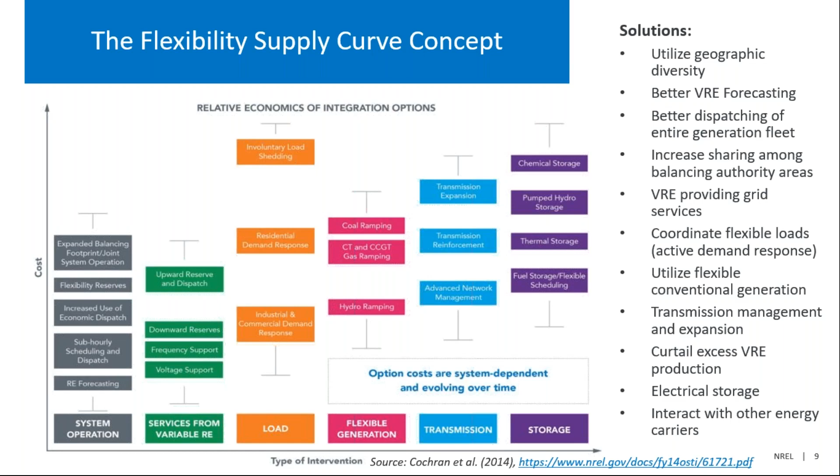You can see that storage was on the far right of this. It was the most expensive type of intervention you could do to get flexibility. There were a lot of cheaper things: increase your dispatch, build transmission, or get better forecasting of variable renewable generation. So there's a lot of things you could do, and we said do all this other stuff first and then do storage, because storage is too expensive. And because people kept saying you need storage for renewables, and we said no, you could get a lot of

renewables without storage. And then this thing happened where battery pack prices dropped by 90%, with projections to continue to decline. You've seen advances in other technologies besides batteries, so storage is becoming a much more viable technology. It's not the thing you do at the end once you've exhausted other options. Storage is moving more into the mainstream as something you do just because it's cost effective and cheap. And that's changed how people approach renewable energy integration in the power system. It's been really fun to see this change and see things evolve.

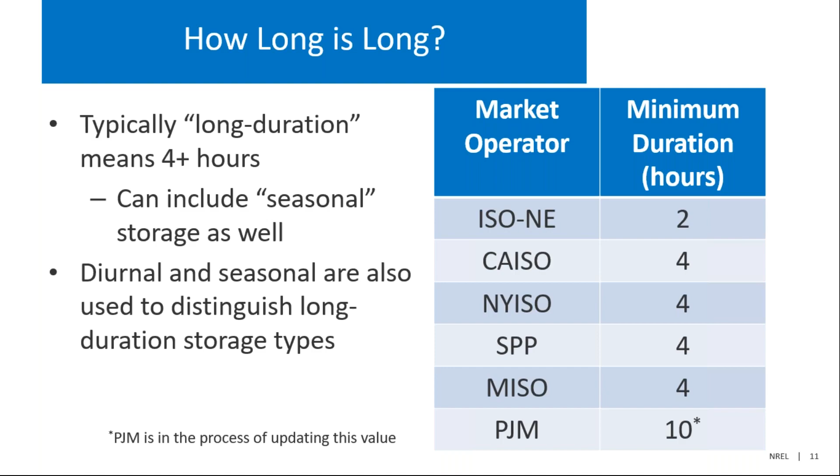So in a pumped hydro storage system, the size of your reservoir drives your energy capacity, your number of hours of storage, versus with a battery plant, it's the number of battery modules. So what counts as your long duration storage is going to be different based on the type of storage system you're looking at. And the way you add more power versus more energy is going to change based on the type of storage system you have. So this also makes storage really interesting, because the cost of adding power versus capacity is different in each type of storage system. It makes different types of storage able to contribute to the grid in different ways.

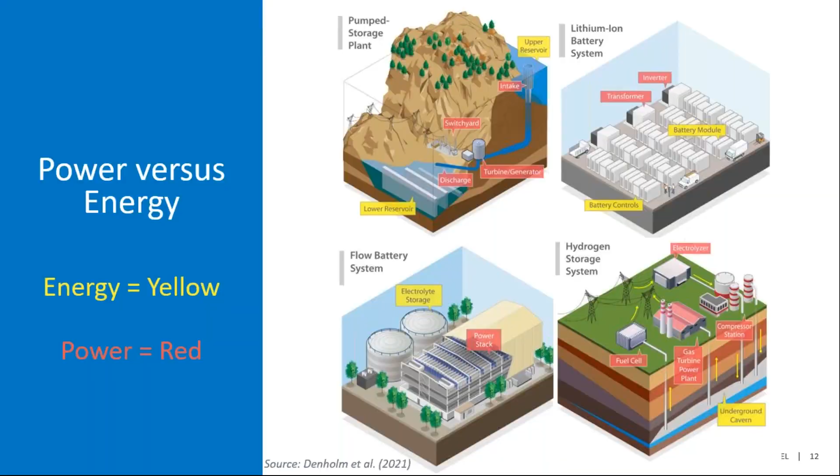You need to know what that system is for. The other thing I want to highlight is just that the battery is still a huge part of the system cost. So when you're looking at how much it costs to install a battery system, the battery is still the largest single chunk of that. So even though battery costs have come down a lot, that's still where most of the cost goes for these systems.

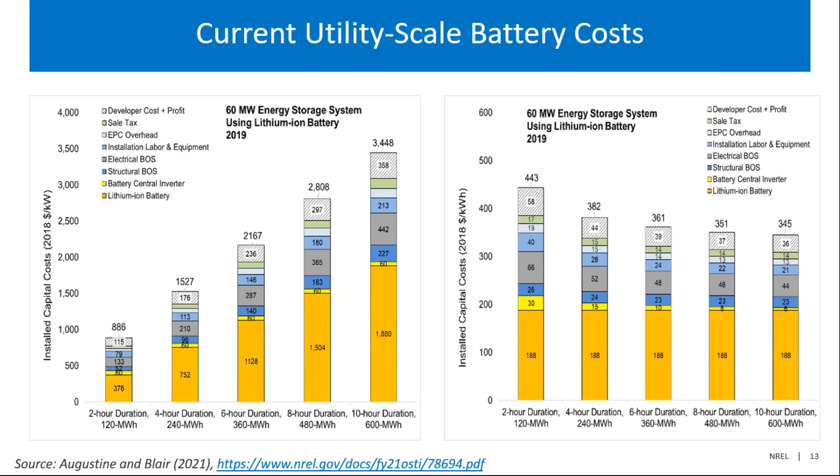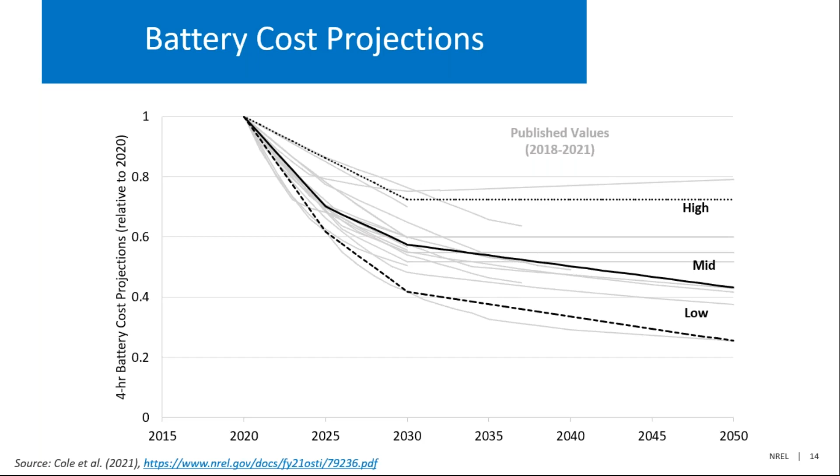So it's a pretty exciting thing for the battery space in terms of a lower cost storage option out there to supplement the variable renewables that are going onto the grid. So I want to shift here to talking about how we see storage getting deployed and how storage deployment might evolve out into the future. So this is kind of a conceptual framework for how we're thinking about storage deployment in the United States. So we already have a lot of storage out there.

So we've got the 23 gigawatts of pumped hydro. That's in this 8 to 12 hour range for most of it. It does vary in its duration, and it's used for a lot of different things. That was built quite a while ago. It's been a long time since a new pumped storage facility has been built. So that's stuff that's already there.

Then phase one, the first phase of storage deployment, has been the stuff that's already been happening over the last decade or so, where we're looking at operating reserves, short duration batteries that are primarily doing short duration services. Those have been happening. That market's pretty shallow. There's less than 30 gigawatts for all of these reserves across the whole country. So even if storage provided all of those, you'd see less than 30 gigawatts of deployment. And it's unlikely storage would be the exclusive provider of operating reserves, given the amount of capacity that already participates in those markets.

So then the big market that really gets a lot of people excited is this peaking capacity market, where you're deploying storage to serve as a peaking plant. These would be in the 2 to 6 hour range, more in a 4 to 6 hour range for more of those, where you need to ride through an afternoon or evening peak with a storage device. And so there's a lot of potential for that. It's strongly linked to PV. We'll explain how that works, but up to 100 gigawatts of potential there.

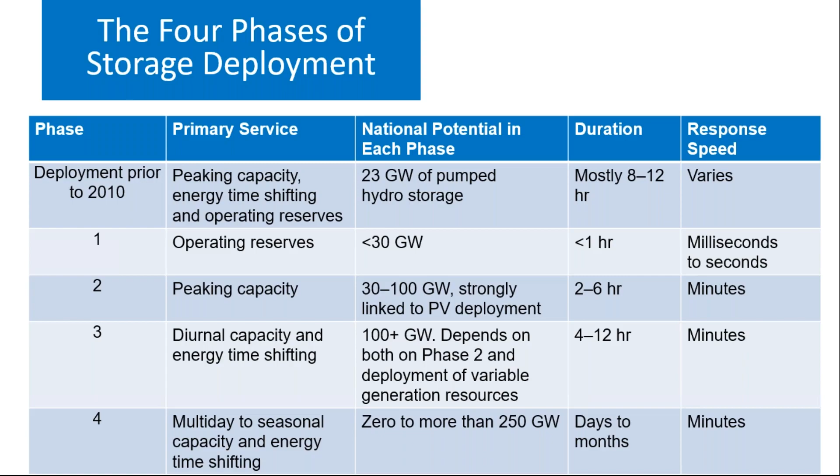And this one is unclear what its potential is. A lot of it depends on how far you want to decarbonize the grid, how much renewables you want to put on the system, and how cheap it could get. Those two pieces will drive its potential. So I just want to talk about a couple of these pieces real quick, and then we'll hand it over to the next folks.

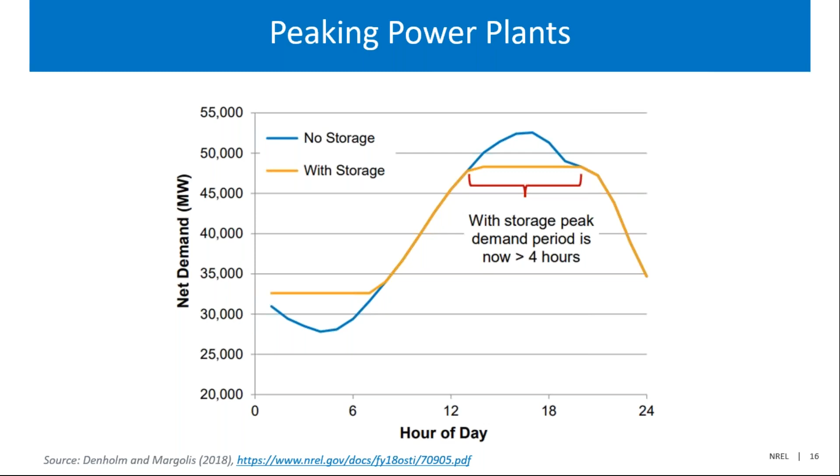So after you added 3,000 to 4,000 megawatts of 4-hour storage, your peak is now flat and it's longer than 4 hours. You can't put another 4-hour device on the system and be able to serve that peak because it's now too wide. So people looking at this know that you're going to eventually saturate these shorter durations, the 4-ish hour range.

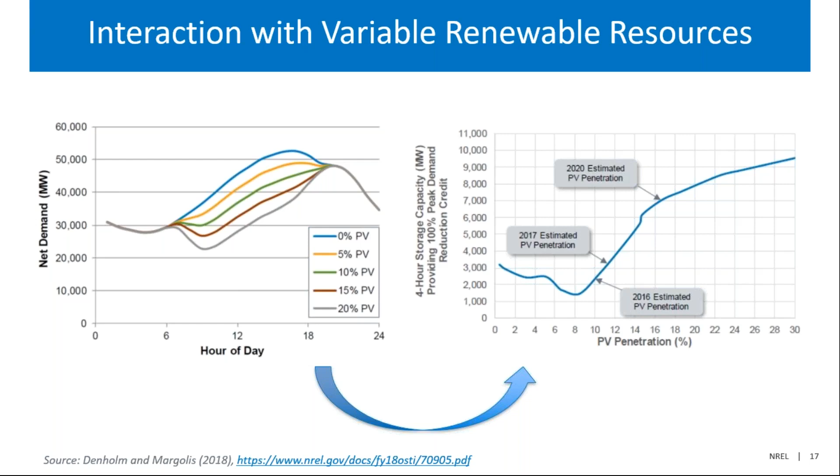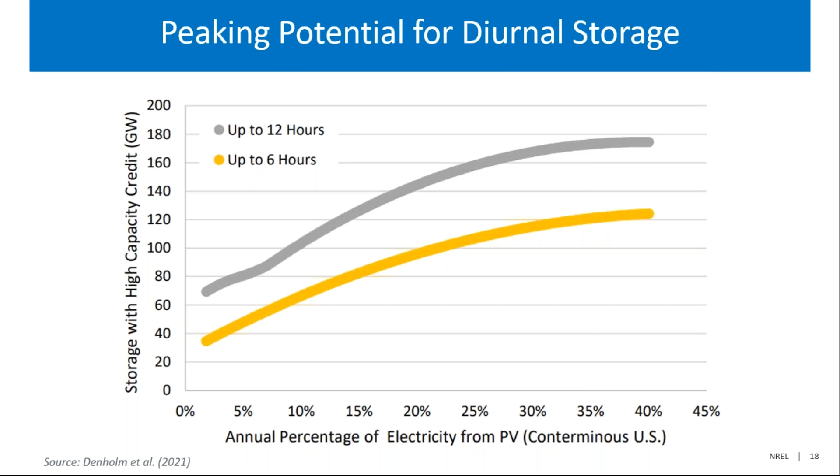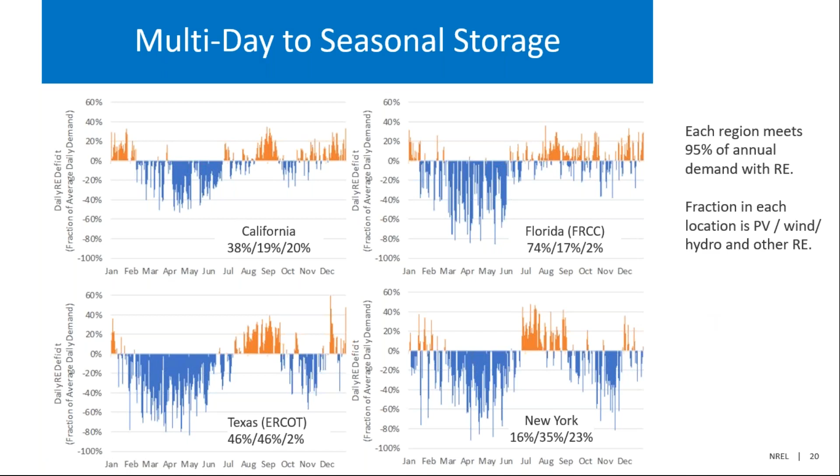So once you start getting these really high renewable energy penetrations, you need these longer durations. You need to move to these multi-day seasonal things. And this is an active area of research. There's a lot going on here to try and understand what's going on. So this is all really fun work. I've enjoyed being involved in this.

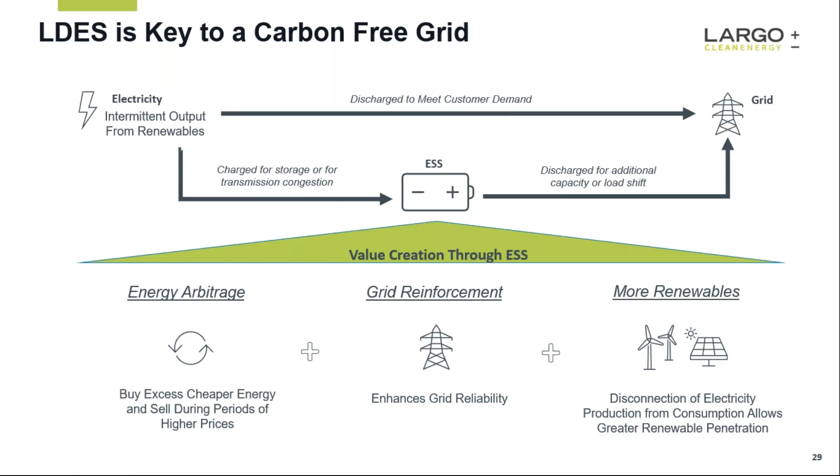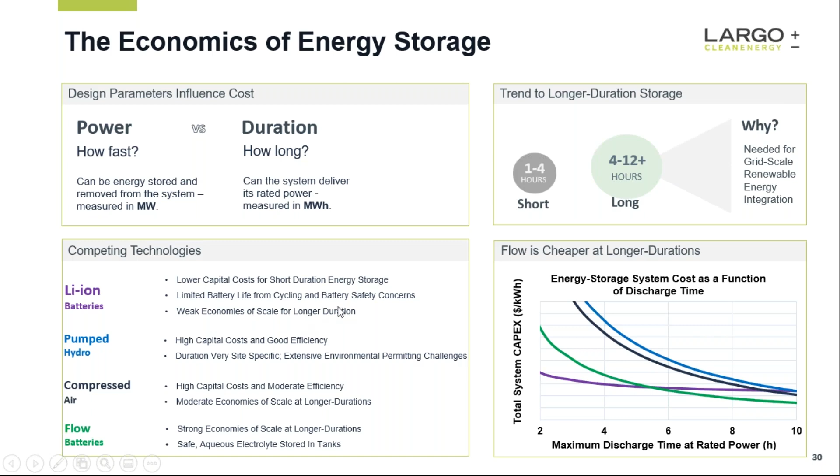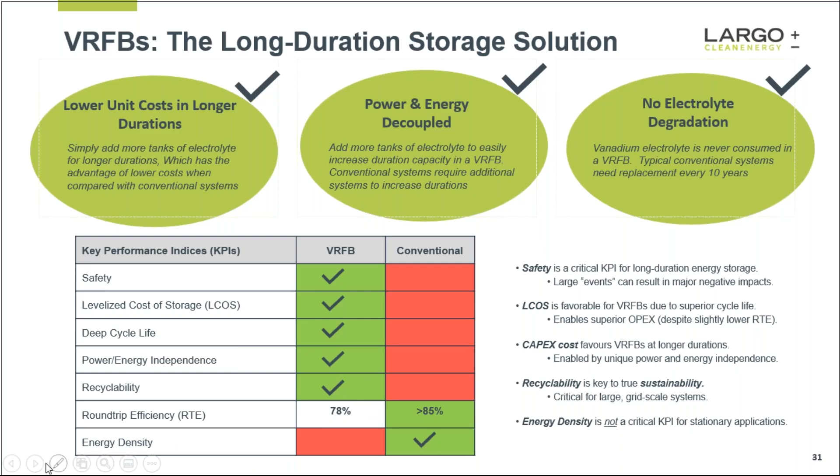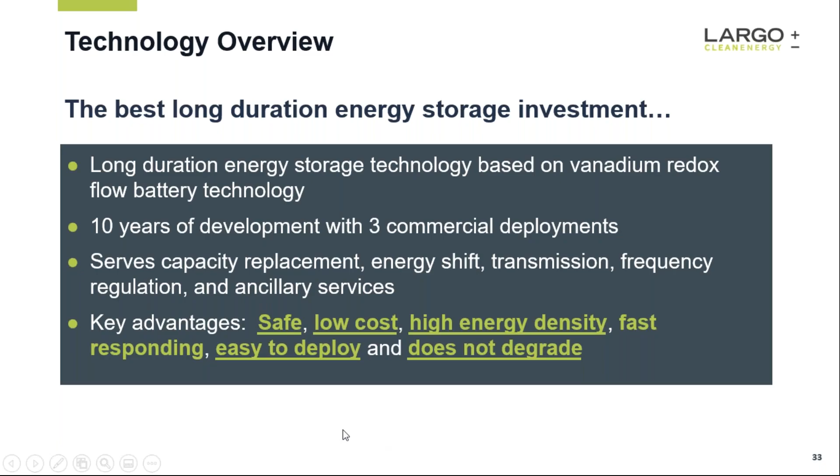The technology is very flexible, so it can really serve all the use cases: capacity replacement, energy shift, transmission, frequency reg, and ancillary services. The last bullet is something my sales guy wanted to make sure I told you, is that it's safer, lower cost, higher energy density, fast responding, easy to deploy. But I think the most important thing is the vanadium flow battery just does not degrade. So if you have a proforma of a 30-year life or a PPA of over 20 years, this is really a good investment.

So our deployment really also is very simple. It's to be fast while mitigating costs and schedule. We are a vertically integrated company, so because we supply our own raw material, which is the vanadium, we have certainty on cost and supply of the vanadium. The strategy for us is to have fewer entities touching our products. So we have our own manufacturing capability where we make the stack containers, the electrolyte containers. So we make that all in-house, ship it to the field.

We also have mobile portable systems so that depending on the location, we can just make the electrolyte right there on site. We have a global supply chain where we have strategic agreements with global suppliers. This will be key for us to continue our cost improvements. We have full EPC capabilities, and as I mentioned before, we provide a long-term supply agreement for all our projects.

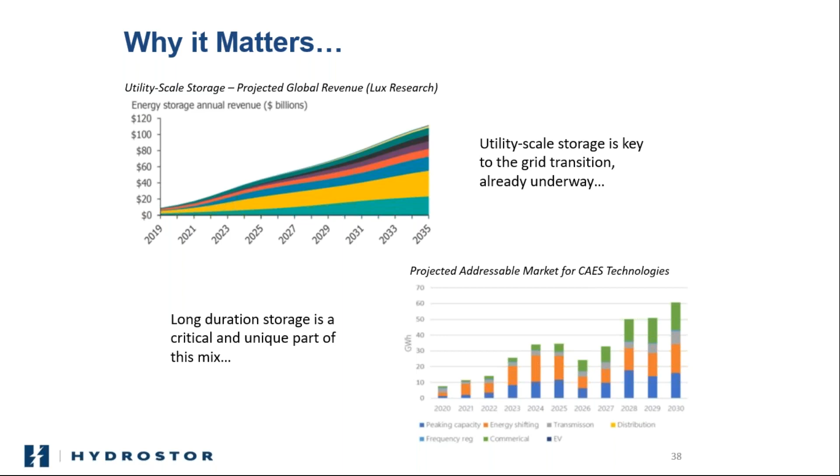I'm going to skip down a sec because this slide might be a little out of order. I want to explain where we see the value proposition near term for long duration storage. You hear a lot about renewable energy integration, and that is an important driver - we're usually going into markets with high renewable penetration or growth in renewables, because the ability to shift that into periods dealing with the duck curve and peak requires more than 4 hours of storage. But what we see as a real near-term market opportunity is more on the locatable capacity side of things. There's a lot of fossil plants retiring, and a lot of transmission required, and a long duration resource can fill that need directly.

This is where Wesley's presentation was excellent - a few points we may view a little differently. We look at the definition of long duration storage really more as 8 hours plus, and there's a good reason for that - it's typically what's required to be effective capacity. I realize the ISOs have set minimum requirements around 4 hours, but even those same ISOs are adopting an effective load carrying capability construct, with buckets that recognize the additional value long duration storage can provide. That recognition is only growing over time. There's been lots of studies showing that to reliably replace a fossil plant, or many types of transmission assets, you need 8 to 10 hours of storage, which is why PJM initially came out and said they need a minimum of 10 hours, although they're migrating to an ELCC construct now as well.

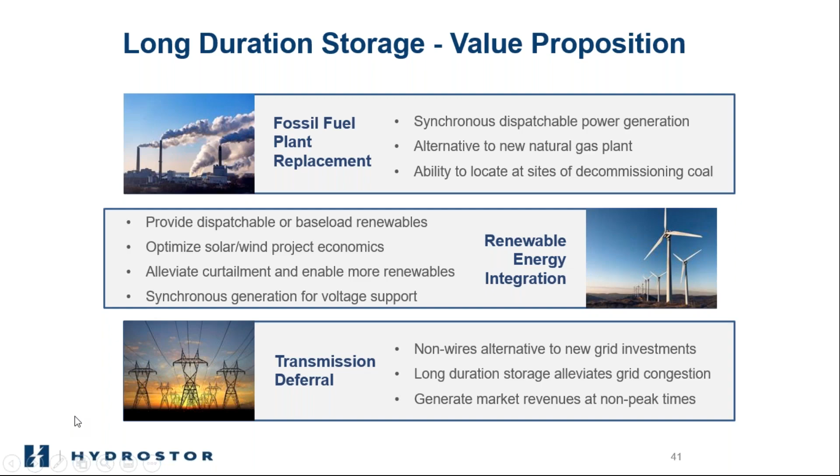I won't dwell on this either, but it's worth noting there are some barriers being addressed right now, and we've seen big changes over the past couple of years. Storage increasingly is being looked at as a transmission alternative. California has toyed with that, and we've been in a process there. Australia is actually doing that. In a lot of other places, they've put out RFOs for alternatives to transmission that are typically storage. So the ability to qualify as a regulated asset and then operate as both a market and network asset is proving to be really important. Chile's taking steps on that, Australia is taking steps on that, and I think FERC is starting to get there, but more work is required. We'd be happy to talk about that a bit more with the broader industry.

Other regulatory barriers that are sometimes in place include making sure that network charges aren't applied to the load side of storage.

Seems pretty basic. A lot of jurisdictions have already addressed that, including Australia, California, Ontario, but it's not always the case, and it can be a problem for projects. So it's just another area of focus going forward.

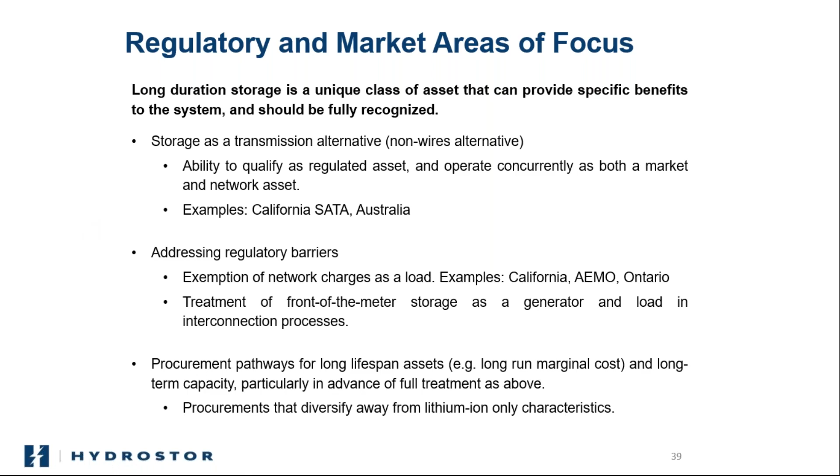I do think procurement pathways are important in the near term. Part of the reason is, even if the grid operator is putting minimum requirements in for capacity qualification, what we're finding is the planning authorities, for example in California, have gone out and said, independent of that, we need 1,000 to 1,600 megawatts of 8-hour plus storage by mid-decade, because they need that to replace retiring conventional capacity. So the planners are actually already ahead of the curve in saying they need 8-hour storage.

We've seen that in New South Wales. We've seen that in California. We're increasingly seeing that in places like Ontario, and even some of the jurisdictions that Sal pointed out on his map as well. Again, it's being driven by this locatable capacity requirement.

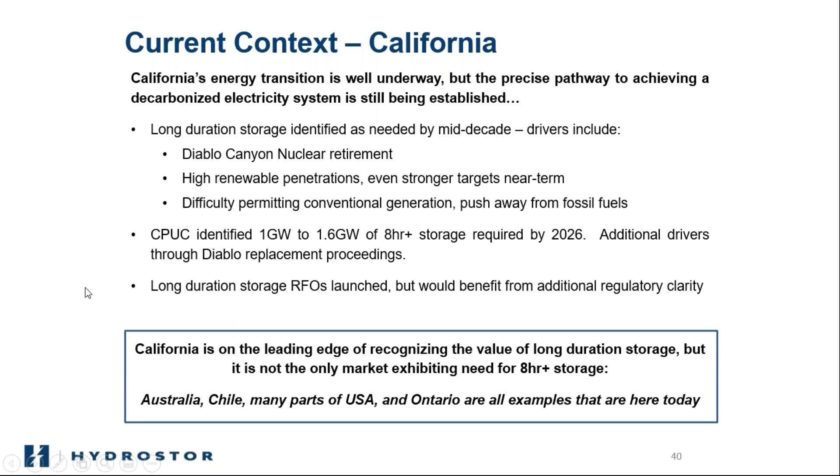California is just an interesting example I put in here as context. There are obviously lots of others, and we think it's quite informative. California is very close to releasing additional procurements for 8-hour plus storage, which is part of the reason why we're actually quite busy there.

So this is my own stab at comparing some long duration solutions. This isn't comprehensive, but a few key points I'd make, looking from even the advanced CAES perspective. One point is that we're often compared to lithium ion batteries, but I don't really see us as competing with that. I think lithium ion batteries are synergistic with us.

I think they work really well at fast responding, shorter duration applications, and they're high efficiency before their performance degradation kicks in. So these are all advantageous. But the reality is, for long duration applications—6, 8, 10 hours plus—they just aren't cost effective.

Even with the cost declines that Wesley was showing up front, I'd be happy to talk to folks after or during the Q&A about some of the drivers that show that even out to 2030, for an 8-hour or 10-hour application, a Hydrostor advanced CAES asset, and maybe some other technologies as well that are more mechanical or even flow batteries, would be cheaper than lithium ion for those applications. So it's a good mix.

You can see the trade-off with advanced CAES—we just have a lower efficiency, typically between 60 and 65%. But what we find is it kind of makes us like a pumped hydro asset that can be flexibly sited, so very valuable to provide capacity. It's really just a slight increase in operating costs. The trade-off is that pumped hydro's efficiency would be higher, but what we're finding is, for the applications we're quite busy on right now, that difference is not actually that critical to the overall economics. In fact, the ability to site this where it's required is the most critical.

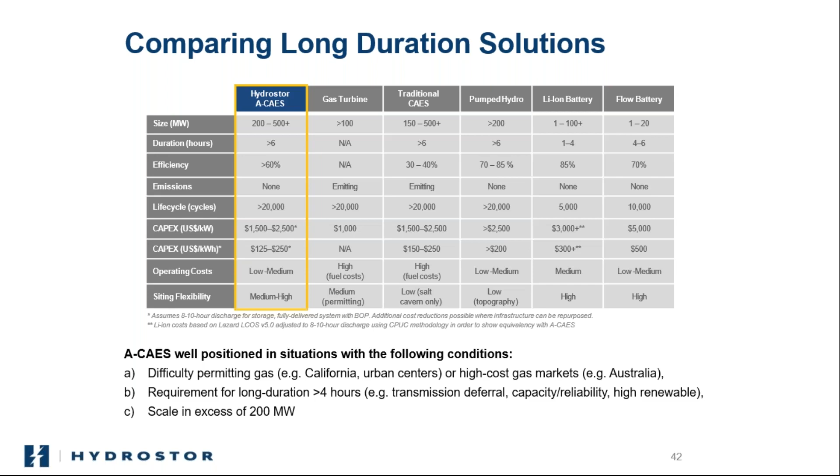I won't dwell on flow batteries—I think Sal explained that really well and probably has a better handle on the costs. Where we come from with advanced CAES, we do well in areas where we can have scale. We have similar cost declines with duration as what Sal was showing on flow batteries as well. So where you really can't permit gas, or there's high cost gas markets, and there's already a requirement for longer duration storage, this plays really well in an area where you're going to be $125 to $250 per kilowatt hour deployed at these scales.

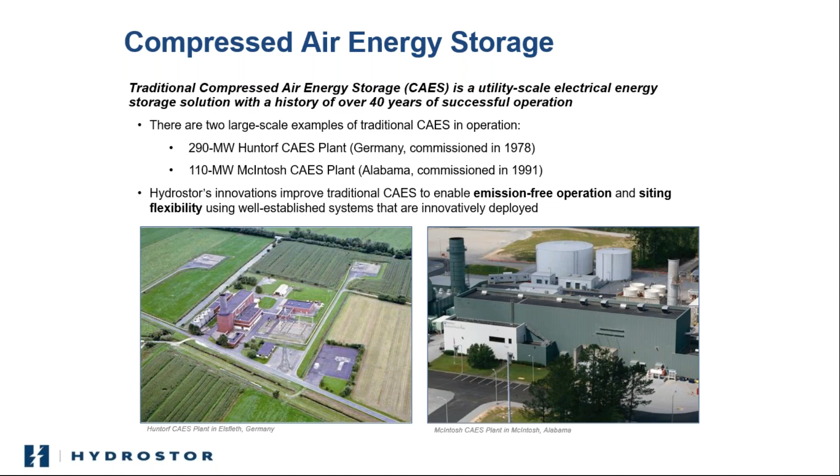So I'm going to go through this really quickly, probably just spend a minute on it. I won't dwell on compressed air energy storage, just to point out that our platform is really built on the same platform as CAES, which has been proven for the past 40 years on utility scale plants. So we've just addressed it by getting rid of the emissions and being able to flexibly site.

Happy to talk to folks after about how we do this, but effectively we're building a cavity underground, and we have a small water reservoir that's about 20 times less volume than an equivalent pumped hydro facility, and we're cycling that water back and forth with the air as it's getting compressed into the chamber. I'm happy to share a video with you guys that explains that a bit more if anyone's interested.

That's key to us being energy dense enough that we can flexibly build this where it's required on the grid. Incidentally, that's the difference between us and pumped hydro. We're using the same water head, we're just not running it directly through a turbine. So our efficiency is slightly lower, but the compressed air - we're taking that water head and transferring it into air pressure - is so much more space efficient that it allows us to build these cavities out cost effectively.

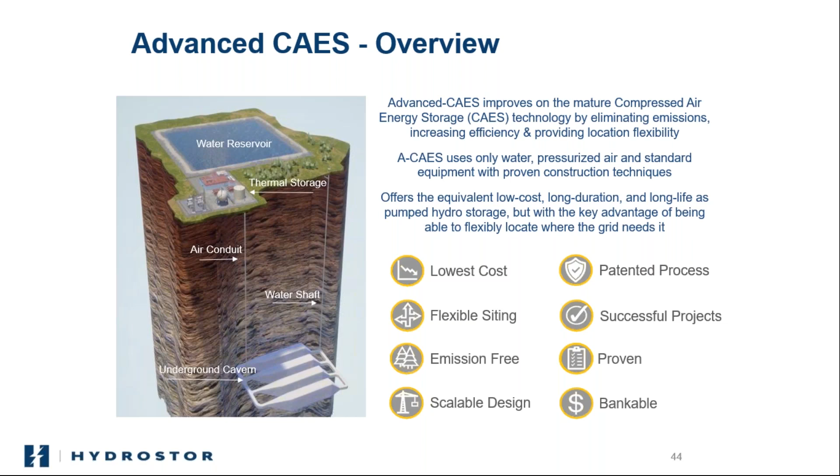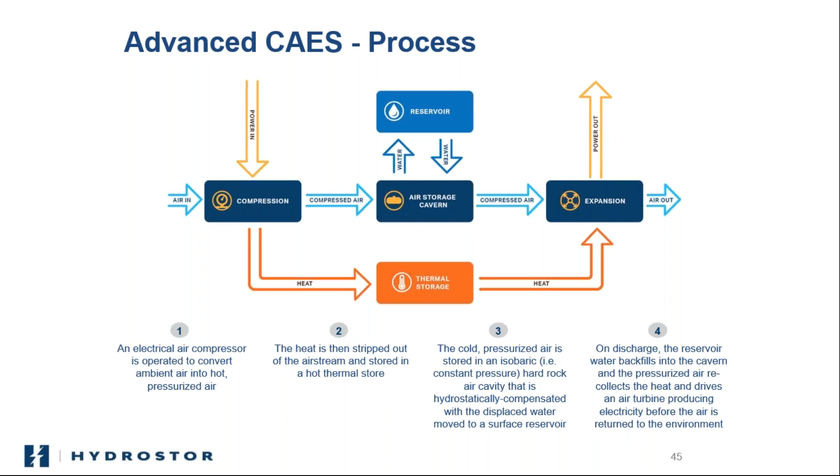I won't dwell on the process, but needless to say, we're just taking heat from our compression process and storing that, putting it into our expanders. So that's what allows us to be emissions free.

On delivery, I'd point out that often when we talk about long duration storage, we treat it as theoretical - a bit longer term, pre-commercial. But the reality is we're just building on existing supply chains already provided at scale for the same applications. There are really only three main subsystems for us: thermal storage, turbo machinery, and subsurface cavern construction, all off the shelf with thousands of precedents.

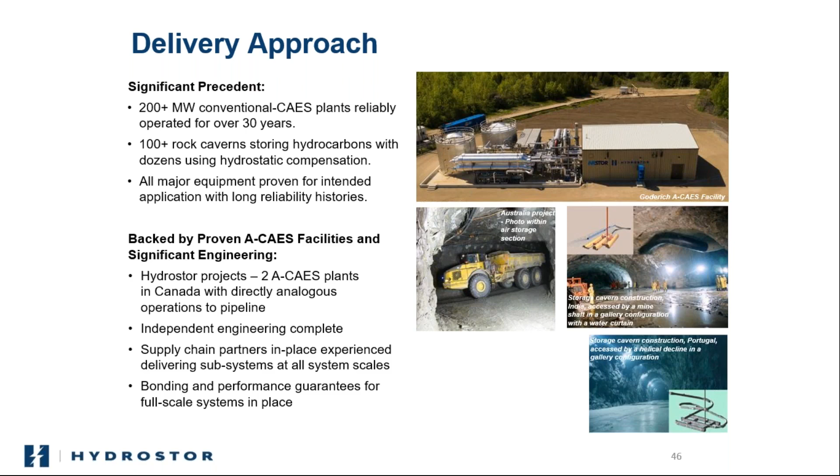So we've already lined up performance guarantees. We also have LTSAs, and additional construction bonding already available. That's what allows us to have lined up these global delivery relationships, whereby we're already in processes right now across the world - some very advanced commercial processes. We're in negotiations in California. We've been selected as a preferred wires alternative in Australia, as I mentioned. And we're entering advanced development on about 12 to 14 other opportunities globally, typically at the multi-hundred megawatt scale where we're very cost effective.